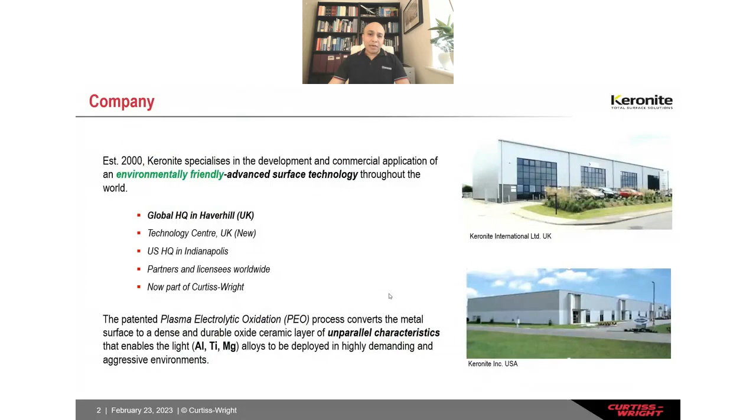Now, from November last year, we are part of Curtiss-Wright. Just to give you a bit of background about Curtiss-Wright as a corporation: Curtiss-Wright has an incredible, proud history. Curtiss-Wright was formed through the merging of 12 Wright and Curtiss companies nearly a century ago.

Let me say a few words about Curtiss-Wright. For those who haven't heard about it, Glenn Curtiss was the father of the US aviation industry. And I'm sure many of us may have heard about the Wright brothers when we were younger in school, and they were credited with inventing, developing, and flying the first motorized aircraft in the world. There you go, it's a very proud history.

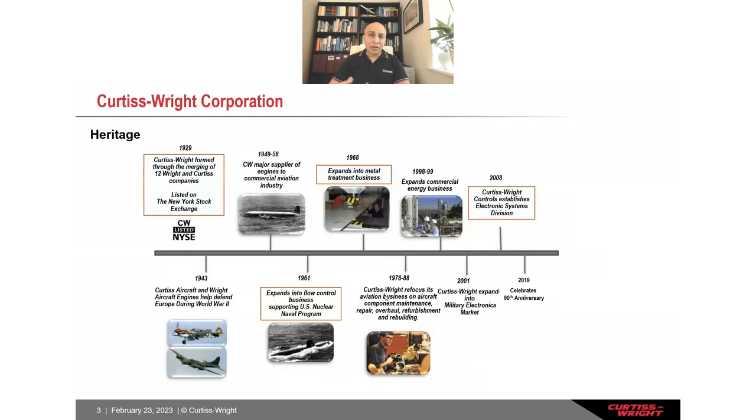And today, Curtiss-Wright is a global technology corporation offering products, solutions, and services in a diversified industrial market, from aerospace to oil and gas, to power and generation and energy sector, defense, automotive, and medical electronics. Curtiss-Wright has its own surface technology division that offers solutions in materials and surface technologies.

It has over 75 business units across the world, as you can see, with lots of dots in North America, in Europe, and a few in Asia too. And now, as Keronite joins, we'll be adding 2 more dots there, one in North America, in Indianapolis, and another in the UK.

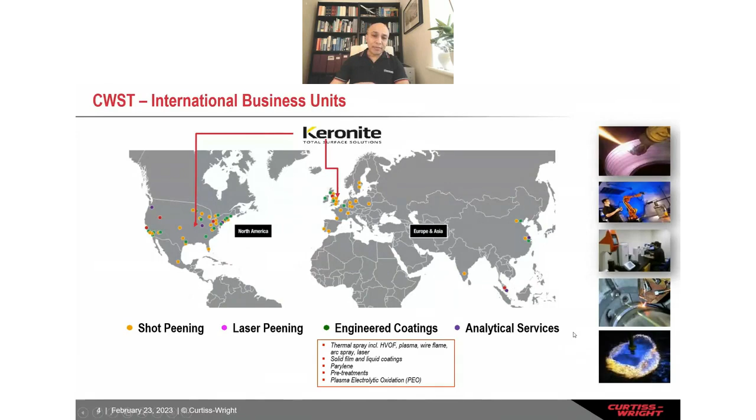When we talk about light metals, the first thing that comes to my mind is aluminum. It is probably the most widely used light metal. Aluminum production is more than all non-ferrous metals combined, and it's considered the second king of metal after steel. Aluminum is considered a developed metal rather than a discovered metal, over a century ago, and today its production has grown exponentially from zero around 1900 to now over 75 million tons a year.

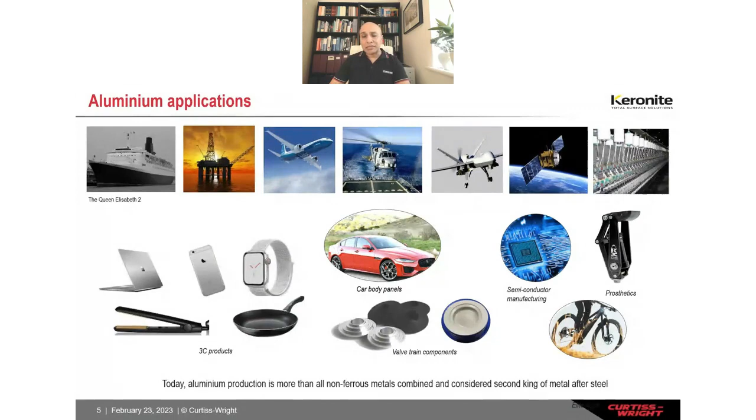Aluminum is so attractive in diversified applications. You can see in these pictures aerospace, ships, drones, and satellites, textile, automotive, and everyday products like laptops, phones, and cooking frying pans, etc. So all of us may have, at some point, touched aluminum as a material. It has an extensive applications portfolio.

So why light metals then? First of all, it's very attractive because it's quite lightweight. Imagine you have to transport lightweight components, parts, anything from one part of the globe to another - you save fuel, you minimize emissions, right? And if you imagine lifting 1 kilogram of weight against gravity to low Earth orbit, you save $50,000 per kilogram. That's a massive saving, right?

Some of the key strengths of light metal: it's substantially lighter - for example, aluminum in our case is 1/3 the weight of steel. It has very good mechanical and physical properties. And most importantly, it can be manufactured in varieties of ways, from extrusion to rolling, casting, injection molding, advanced joining technology, and now also a lot in powder metallurgy, where you have extremely minimal waste. And most importantly, it is a highly recycled material as well.

But it does come with weaknesses. Of course, poor corrosion and poor wear resistance is the main drawback of these light metals. It's thermodynamically reactive and is soft as well, and hence we have a big challenge there. We are continuously searching for new surface technologies that can meet new environmental legislations and also offer multifunctional properties to enable these light metals to be deployed in highly aggressive environments.

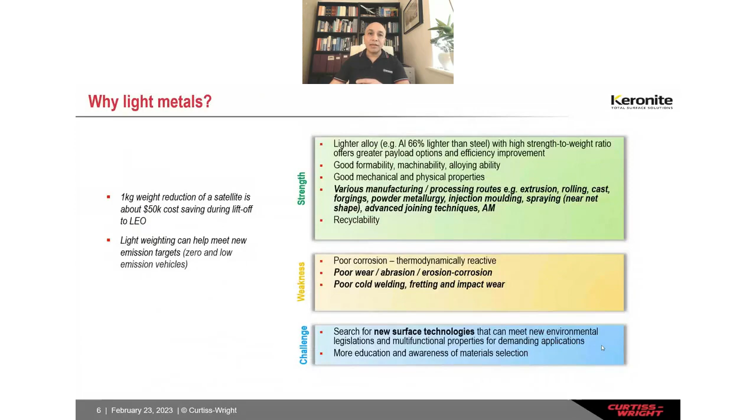The challenge with thermal spray, despite its high attractiveness and versatility, is that it sometimes becomes very awkward on light metals, primarily because of CTE mismatch - the variation of expansion coefficient between, say, aluminum and the incoming hot particles, which leads to poor coating adhesion and flaking.

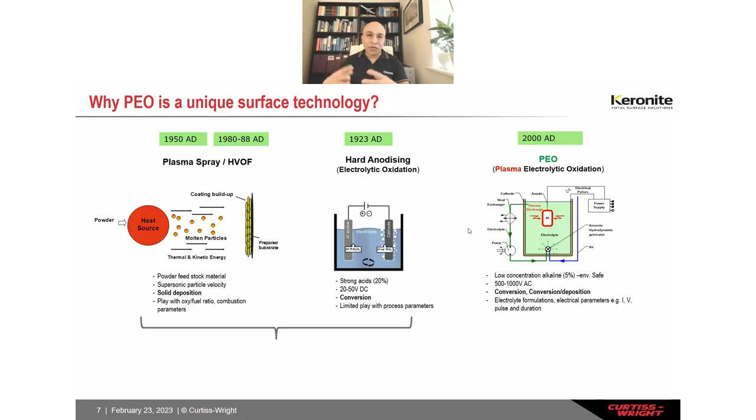The other benefit of PEO is you often use an environmentally safe electrolyte, with very low concentration, less than 5% solid content - typical of a dishwasher liquid that could be disposed of into normal sewage systems. This makes the technology unique, and also, because it's an electrolytic process, you can coat extremely complex shapes with poor line of sight.

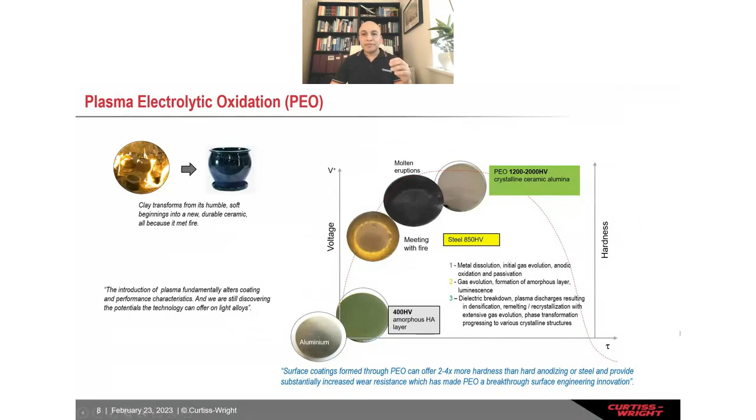Coating design is one of the interesting things about PEO technology. As mentioned before, with thermal spray you can put down a variety of coatings on a variety of substrates. Of course, PEO technology has got some limitations - it is only applicable to light metals.

But the interesting thing is you can change different inputs, like electrolyte formulations. You can change the ionic constituents. You can change the electrical parameters, like the waveform, duty cycle, pulse shape, etc. And by doing so, you can have variable outputs.

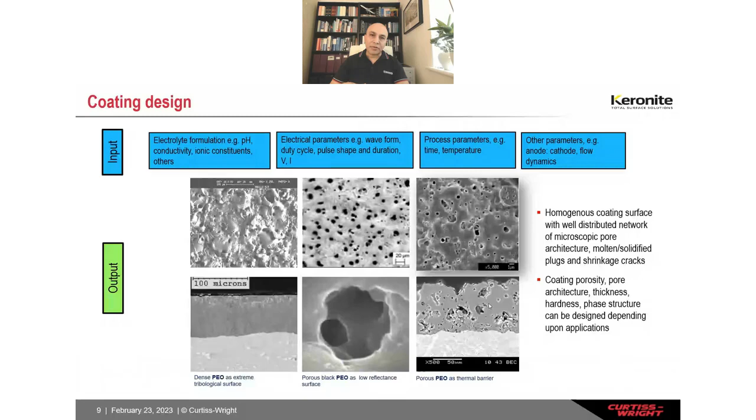On the right-hand side, you can also create aluminum oxide or magnesium oxide spinel type coating, where you can trap porosities with air, giving properties of very low thermal conductivity and low specific heat capacity, for example for applications like thermal barrier coating or piston applications.

Microstructure is quite key. On the top is the hard anodized coating, and the bottom is your PEO ceramic coating on the same alloy. You can see the corners in particular - this hard anodized coating often suffers from what we call truncated V cracks, which result in massive fatigue drop, up to 50% fatigue drop.

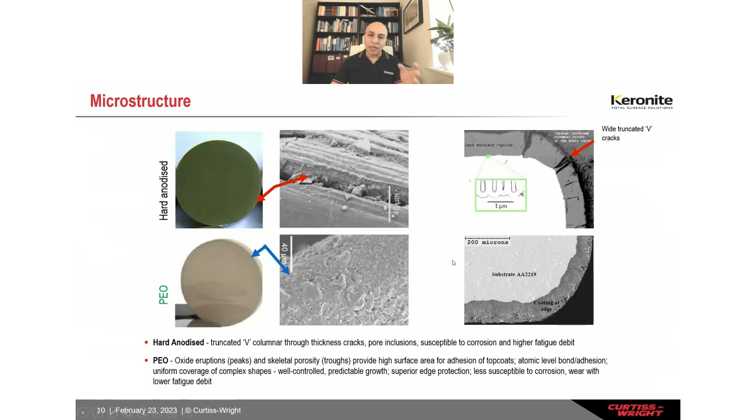This is the cross section. You can see those truncated V cracks extend down to the substrate, making it vulnerable to corrosion, fatigue drop, etc. On the bottom picture here is the same region with PEO - you don't see those wide opening defects or cracks. It's very uniformly covered as well, and you see in the cross section very uniform coverage.

Flexibility is another interesting characteristic of the PEO technology, because of those plasmic discharge events - millions of those happening on the surface give you microscopic pores, shrinkage cracks, etc. That allows you to make the coating very flexible.

One of the Cambridge University PhD researchers measured the Young's modulus of these coatings and found it to be an order of magnitude less than the monolithic ceramic. That allows the coatings to flex and makes it very strain tolerant.

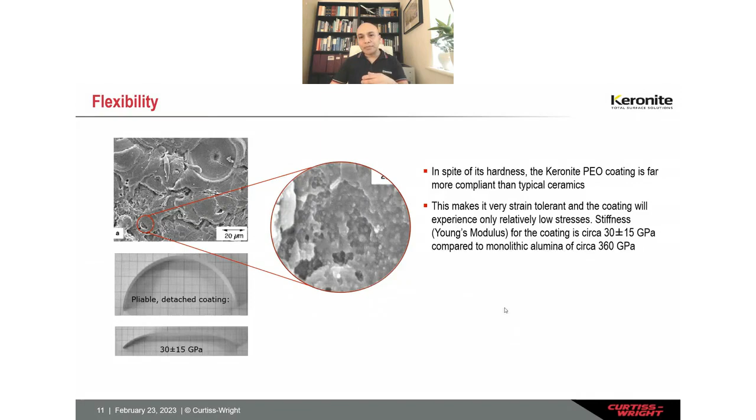Adhesion is another interesting feature. I'd like to show you three pictures here. On the very left is the hard anodized coating, very good interface, good adhesion. This is thermal spray, plasma sprayed alumina, with mechanical keying primarily - you can see from grit blasting, a porous coating. This is PEO alumina here, very dense, very well adhered to the interface.

If you see this plot here, this is the ASTM C633 pull adhesion test. The adhesion of the PEO coatings were in excess of 80 megapascal, quite a lot higher than plasma spray alumina. And here, the dark gray columns are for a PEO coated thin layer, typically 3 to 4 microns, used as a pretreatment.

That's from the lap shear test, okay? If you see, the adhesion values are very similar to chromic acid anodizing. So does that mean we can replace chromic acid anodizing as a pretreatment? Possibly, yes, we can.

And there's already a lot of use of this. When we use this PEO as a pretreatment thin layer and apply a subsequent secondary layer, for example a paint or a powder coat, your critical failure load for adhesion becomes extremely, extremely high. It's very, very resistant to scratch.

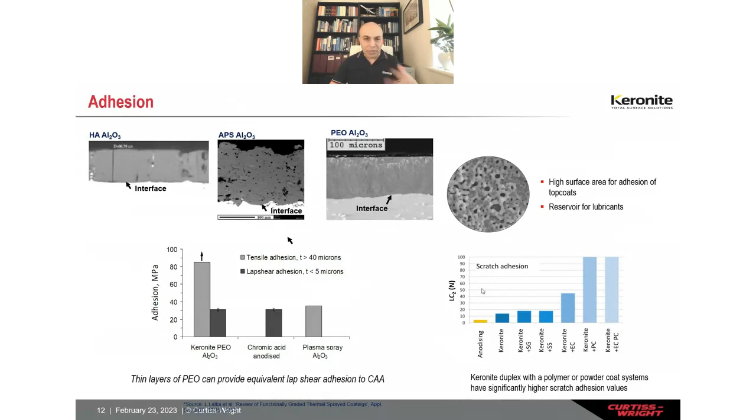Sliding and abrasive wear is another interesting factor here. These coatings have about 1,200 to 2,000 Vickers hardness, which is a lot more than even hardened tool steel, which is about 800 Vickers, and hard anodized, which is about 400 Vickers. This is literally 4 to 5 times harder than hard anodized coating, and significantly harder than hardened tool steel as well. That offers incredible wear resistance to the PEO coating.

On the right-hand side is the abrasive wear resistance. You can see again, this PEO coated sample has much less volumetric wear compared to even nitrided steel.

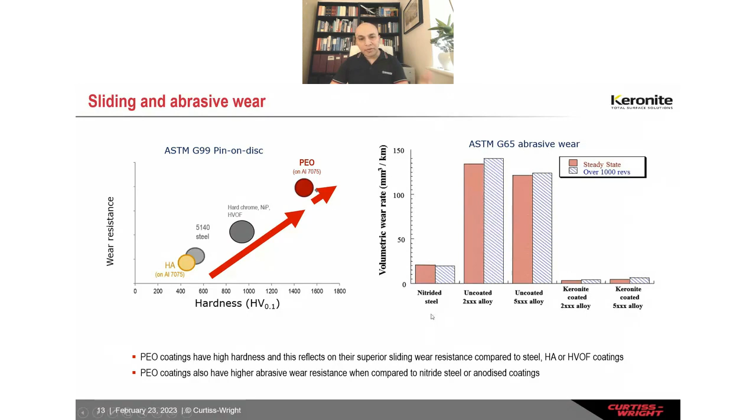Corrosion is another interesting factor. As I said before, those truncated V cracks on the hard anodized coating result in premature corrosion from the edges, for example. This could impact fatigue and even worse, corrosion fatigue. The PEO coating doesn't tend to show those issues.

On the bottom picture we have a powder coated aluminum substrate. On the left, you have the chromic acid anodizing treatment first. On the right-hand side, you have a thin layer of PEO. What was done here is the powder coat was deliberately damaged, scratched, and exposed for 12 months to salt spray solution.

What you see on the left-hand side is typical of what we call corrosion creep. The corrosion is migrating underneath the paint, resulting in a blistering effect deep under the paint. On the right-hand side, because the coating was damaged down to the bare substrate, you will see corrosion happening here, but it's not migrating further because it stopped right there due to a very well adhered ceramic layer.

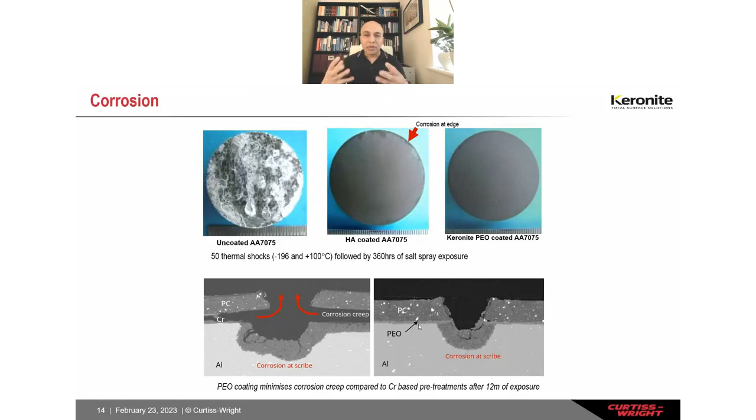Bear in mind that alumina is electrochemically neutral, so it doesn't accelerate galvanic corrosion or anything like that. Having excellent bond with the substrate and excellent bond with the top coat or subsequent layers gives you very good corrosion protection even when it's damaged.

Now, let's talk about some applications.

We recently had big success especially on space missions. Keronite has flown on dozens of missions, including environmental mapping, Hayabusa, Euclid, meteorological operations satellites, Sentinel satellites, etc.

On this middle one, I call it selective masking, because you are coating all of these deep pockets and thin ribs, but also need to mask these shiny areas for electrical grounding purposes. So the electrolytic process gives you the ability to selectively either mask or coat.

On this top picture, you can see the specular reflectance. The PEO coating, the Keronite coating, has in fact very similar performance to the competing coating, or even better, across a wide range of wavelengths. Other coatings are primarily paint-based systems, which are not good for a number of space missions.

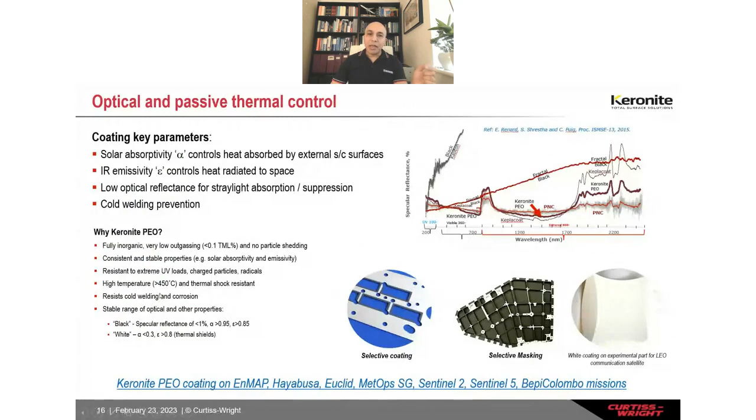Another aspect of the space is cold welding. You often hear about it, and people ask what is cold welding. Unlike arc welding, TIG and MIG welding, it is a different welding process - it's the welding of two components coming into contact in a cold environment.

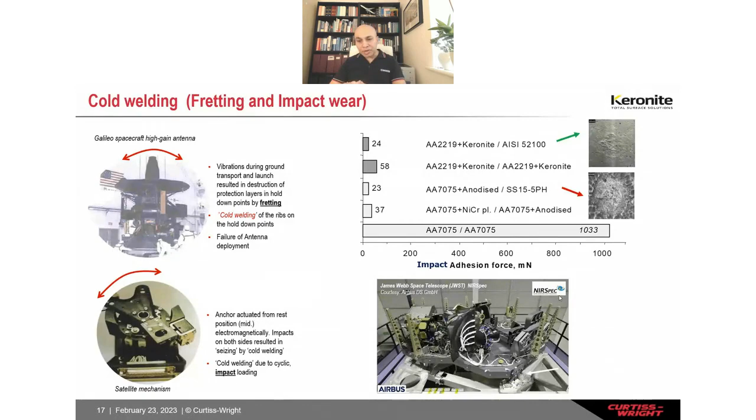After extensive tests on these parts, one of the successful stories was the Keronite coating was sent to the James Webb Space Telescope on board the near-infrared spectrometer built by Airbus, which is one of the critical instruments of the James Webb Space Telescope.

Tribology and friction is another interesting area. As I discussed before, with the PEO coating, all these pores act as a reservoir for either oil or solid lubricants, for example. This is a picture of a ring that was coated with Keronite composite structure, and that was successfully used on the world's largest space observatory in Gran Canaria. This data shows the friction coefficient of the Keronite composite coating at different pressures - as you can see, very, very low friction coefficient as well.

And today, similar PEO coating is already being used in various applications, including the Boeing 737 aircraft.

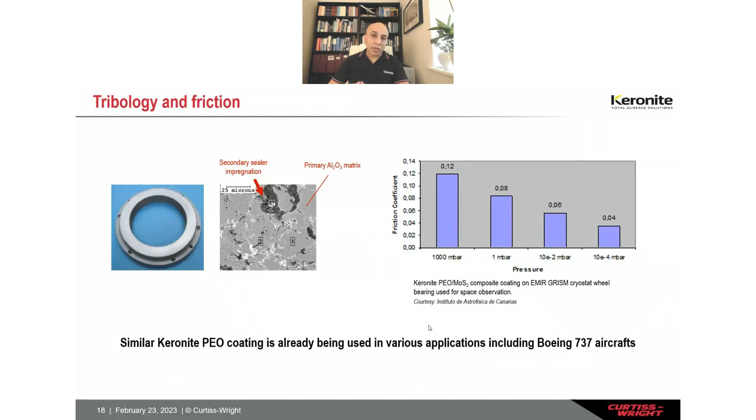Let's talk a little bit about applications now - why we've been more involved recently in brake discs. There's incentive for us because it's a volume market, and also we can make a difference to the environment. Most of us are aware of brake disc technology, and to date mostly grey cast iron is used. A typical grey cast iron disc for a mid-sized car weighs about 40 kilograms in total, about 9 to 10 kilograms per brake disc. If we can reduce 20 kilograms, say by using an aluminium disc instead, that could save 0.1 liter fuel per 100 kilograms, 100 kilometers of travel, and that means a corresponding reduction in CO2 emissions.

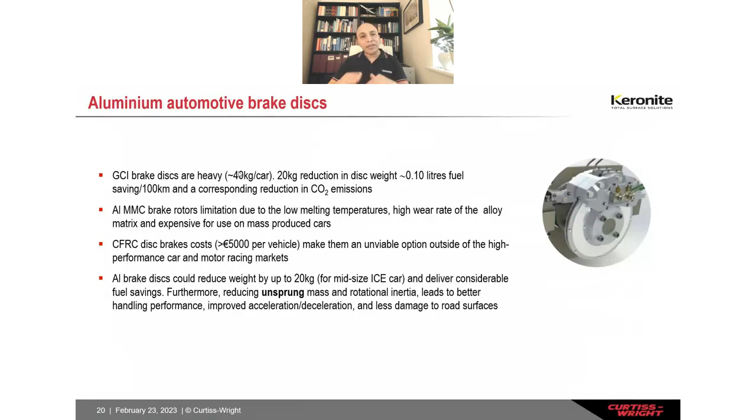It's not that people haven't thought about light materials - yes, they have come up with aluminum MMC and CFRC as well, but they are extremely expensive and become an unviable option outside of the high performance car and motor racing markets. So we thought, let's give it a go with brake discs made of aluminium. If we can save 20 kilograms, it can give considerable fuel savings, and also reduce unsprung mass, which is good for acceleration, deceleration, and also causes less damage to road surfaces. Unsprung mass is anything below the suspension, we call it the unsprung mass.

Just to give a little background on non-exhaust emissions - I've literally been learning about this over the last 5-6 years. People are very much not aware of these problems. What I'd like to show here is road transport particulate emissions, or particulate matter, typically known as PM2.5 and PM10. They are submicron size, they pass through the lungs and create a lot of problems for human organs.

There's a good report done by COMEAP, the Committee on the Medical Effects of Air Pollutants, on this subject.

This equation shows that road transport PM is made of exhaust emissions and non-exhaust emissions. The exhaust emissions are everything that comes up the tailpipe, and the non-exhaust emissions are a combination of brake wear, tire wear, and road abrasion wear.

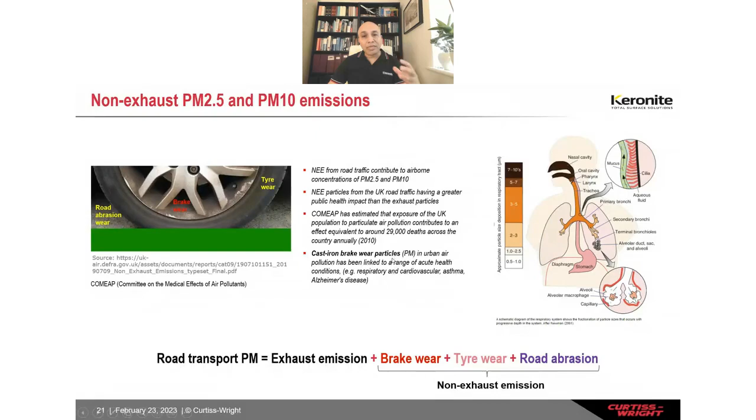The COMEAP report states that non-exhaust emission particles from UK road traffic have a greater public health impact than exhaust particles, and have reported about 29,000 estimated deaths across the country alone. So it's very important that we tackle these particle emissions, whether from brake, tire, or road abrasion.

This has been tackled very well over the last 20 plus years, despite the diesel scandals, especially for PM emissions. We managed to filter it through exhaust gas recirculation systems or using DPF filters, diesel particulate filters, etc.

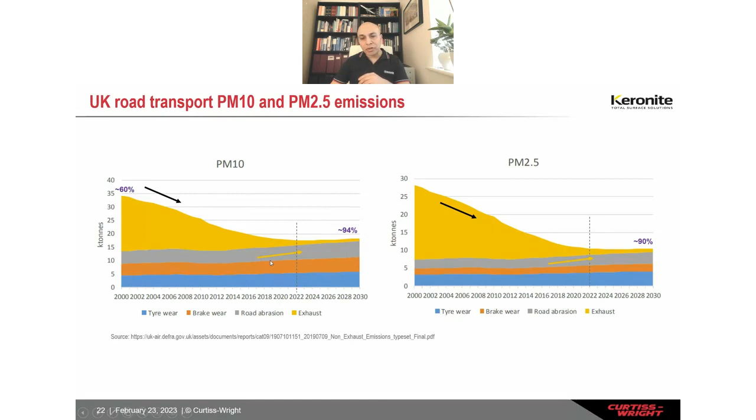But what we haven't been able to manage or tackle is the non-exhaust emissions. It is slowly increasing, and if you see the projected numbers by 2030, it's growing even more.

So we thought, okay, let's give it a shot, and we put a proposal to the UK government, and Innovate UK funded this project. What we did here is test an aluminium brake disc, full size, for a mid-size high-performance car.

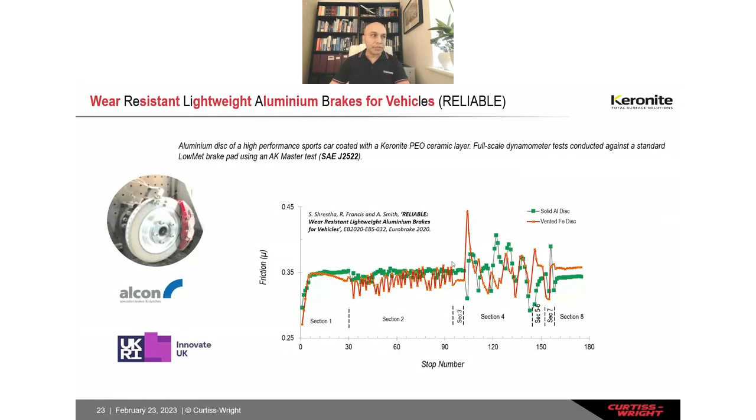Now let's look at the non-exhaust emissions. We've been doing this test for a number of years. Leeds University has an extensive, state-of-the-art facility for measuring brake disc particulate emissions.

This particular data was provided by our student, Fabian Limmer, who's in the last year of his PhD. As you can see, the total mass loss from the gray cast iron system is over here, and the PEO coated system shows about 82% reduction in mass loss.

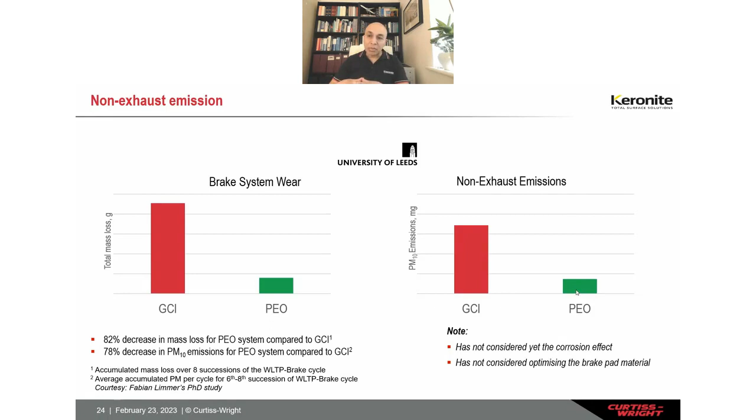If you see on the right-hand side of this plot, the non-exhaust emissions, especially the PM10 emissions, the PEO coated system shows a 78% decrease in PM emissions, which is incredibly encouraging data.

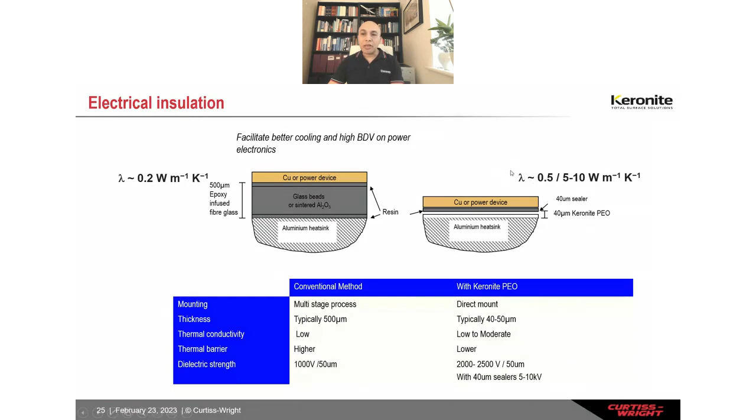If you want to achieve higher breakdown strength, you can seal those PEO coatings with secondary sealers, for example up to 40 to 50 microns, and achieve 5 to 10 kV breakdown strength, while still having substantially higher thermal conductivity than epoxy-infused fiberglasses.

Another interesting area is the aluminum tool — the low-energy aluminum tool heating technology, also funded by the UK government's Technology Strategy Board. The aim here is to form complex lightweight components, lighter than metals, using this thermoplastic fabric, which requires rapid temperature cycling, making aluminum a fantastic material.

So what we did there is coat it with an electrically insulative coating, a thin layer that could dissipate heat fairly quickly during high cyclic loading and fast cycling.

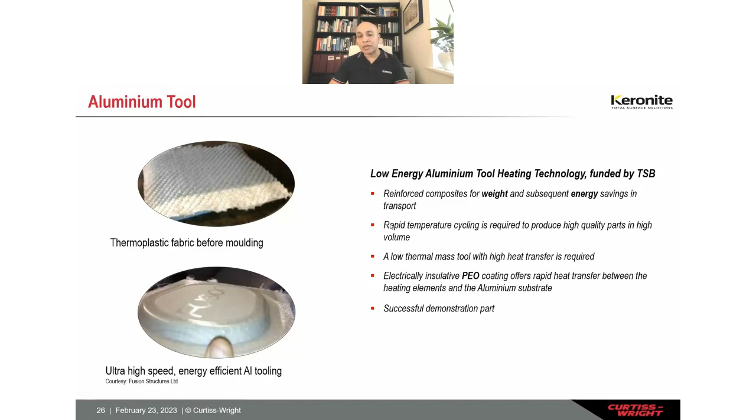Another application is tribological, where you can think about replacing steels with this hard coating, whether it's clutches, gears, valve train components, and in particular semiconductor areas. We are very active there. Semiconductor cleaning and manufacturing chambers require resistance against chemical and plasma erosion from aggressive reactive gases, and these are highly complex parts. You cannot do thermal spray, and hard anodized coating doesn't offer enough protection, hence we have this new coating material.

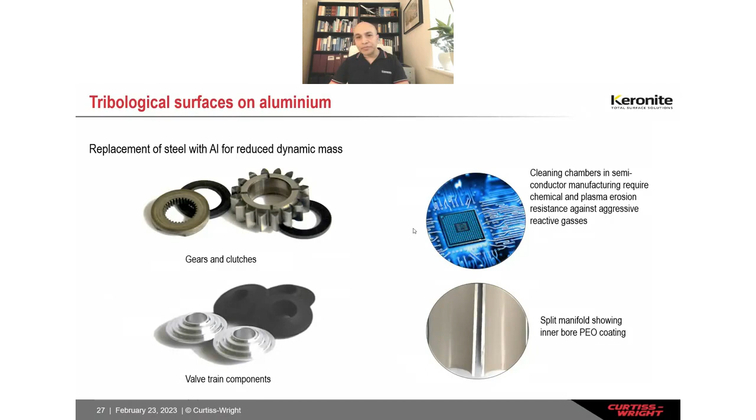There's also a lot of interest in robotic instruments, for example for minimally invasive surgery, because these robotic surgical parts are extremely small - you cannot coat them with thermal spray. They're only a few millimeters in length and a couple of millimeters in width, very tiny. PEO as a technology gives an excellent opportunity to coat extremely small parts.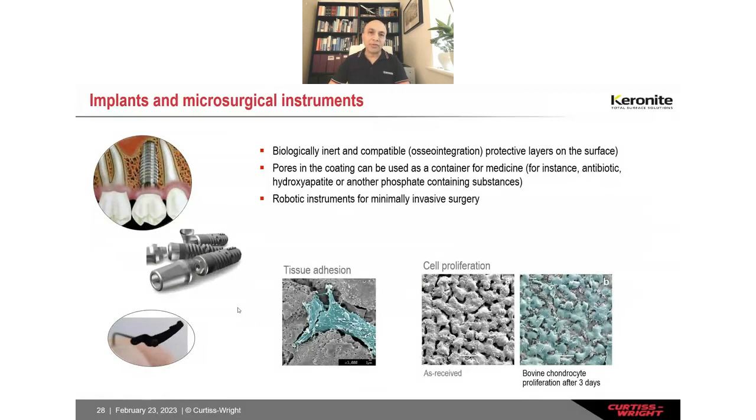Now let's talk about some unique strong points, rather than selling points - these are the USPs for me, the unique strong points.

Can you see this? I don't know whether when I'm showing this you can see that. Okay, I don't hear you, but okay. So this is what you can do with this. Sorry, just here. Okay, yes, we could see that.

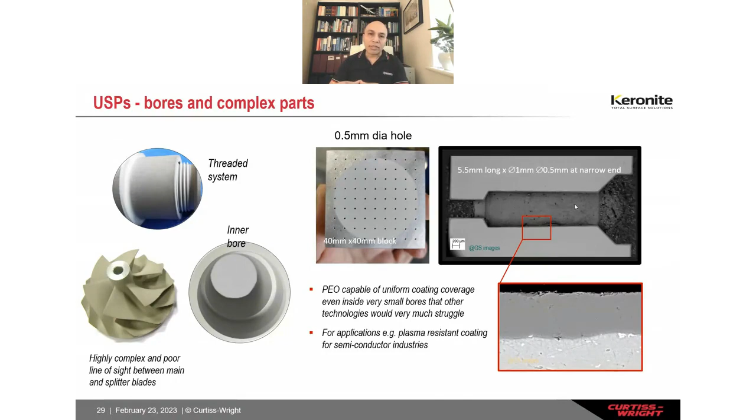These are drill slots about 1 millimeter in diameter and about 5.5 millimeters in length. As you can see, these tiny bores are coated with the electrolytic process. In this section, further down, the SEM picture shows an extremely high dense coating even inside these tiny bores - imagine, a 1 millimeter wide bore, 6 millimeters deep. This is the capability of the electrolytic process that you usually wouldn't achieve with other coating technologies, so it does have unique strong points.

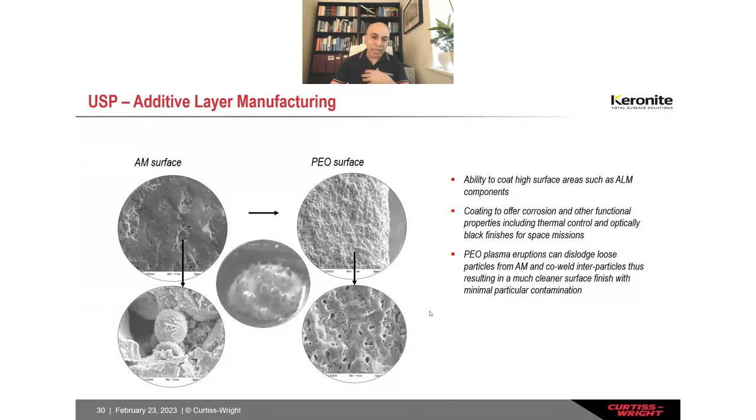On the right-hand picture, you see the part coated after PEO - these flakes are completely gone. If you look at the closer view of this area again, those loose particles and fine dust have disappeared. What's happening here is that during those plasmic and volcanic eruptions, you're either cleaning and dislocating those loose particles so they go into the electrolyte system, or you're melting, re-fusing, and coalescing them together. That's exactly what happens on additive manufacturing parts.

Another strong point is handling continuous large and very small structures. Historically, Keronite as a technology always aimed for mid-sized components, about 1 dm squared to 10 dm squared max for most parts, but we had some requests from space companies.

Hey guys, we cannot use other coating technologies because the environment requires a very good coating like PEO, but we need to coat 3 to 5 meter diameter components for the next generation telescopes. Can you coat it? So we thought, okay, this might be an opportunity. We wrote a small proposal to Innovate UK, and the UK Space Agency funded this project last year, very successfully.

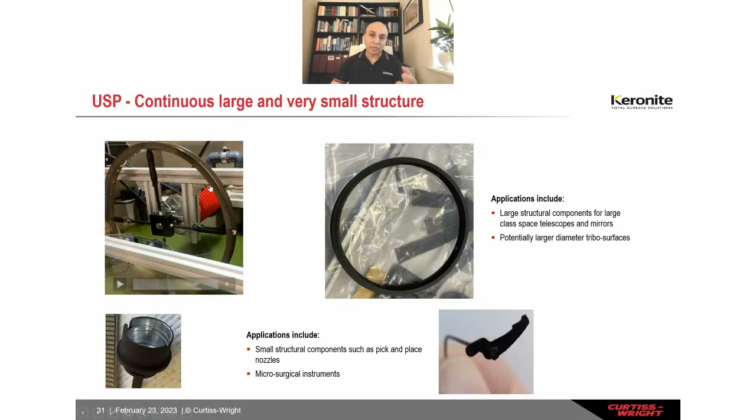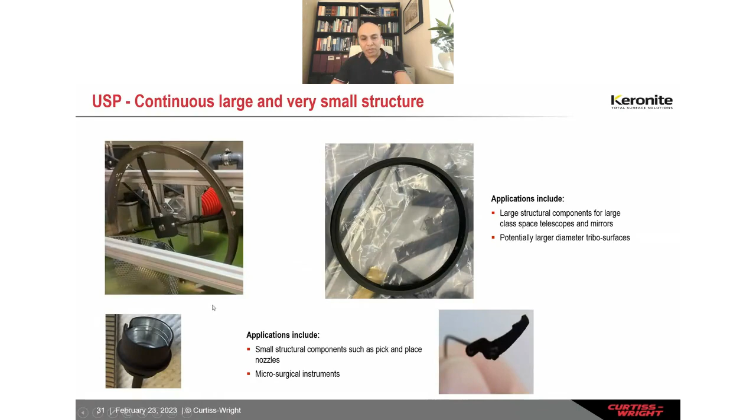This is a mock-up of a large disk, just a 24-inch diameter aluminum disk for example. You can see the beauty here is the whole part is not immersed in the electrolyte as you would in normal PEO systems. Only a segment is being coated. You can see those plasmic events happening at the bottom, here and there. So only a small segment is being coated and continuously rotated, like the Millennium Wheel. And the result is a fully coated wheel.

We extensively analyzed it in terms of optical reflectance, adhesion, and other characterization techniques we used. And the coating, in fact, is very similar to one we would have otherwise coated using a standard dipping process.

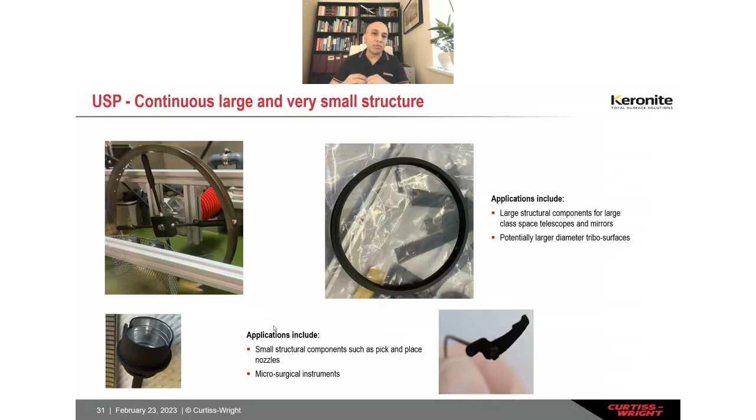Again, we have these little components. Probably other technology would very much struggle with these. These are very, very tiny parts for surgical instruments, or pick-and-place nozzles, very, very small. And this electrolytic process means you can coat extremely small or extremely large components.

The next thing we thought about was, why not use this technology also on thin foils? Of course, anodizing has been done for many, many years - kitchen foils are probably anodized, with a very thin coating, a few nanometers. But now we're talking about a thick engineering coating. So what we did here is coat a 50 to 70 micron thick foil, rolled into about tens of meters, and coated it in a continuous mode.

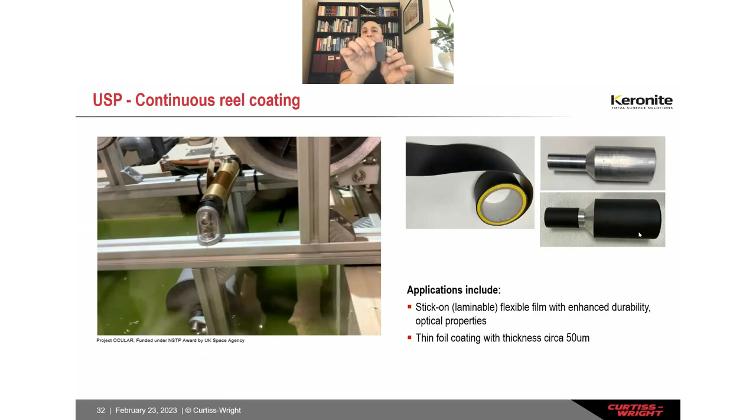And the idea is, rather than having to coat a component, we coat this foil, for example, with a black coating, chop it off with scissors, and then stick it on as a laminable, flexible film. That's exactly what we did - we cut it and wrapped it around those cylindrical surfaces to make it black. For example, you can see this black coating flicked here - it's under tension and it's not coming off. So you can literally wrap it around a part. It is still highly flexible.

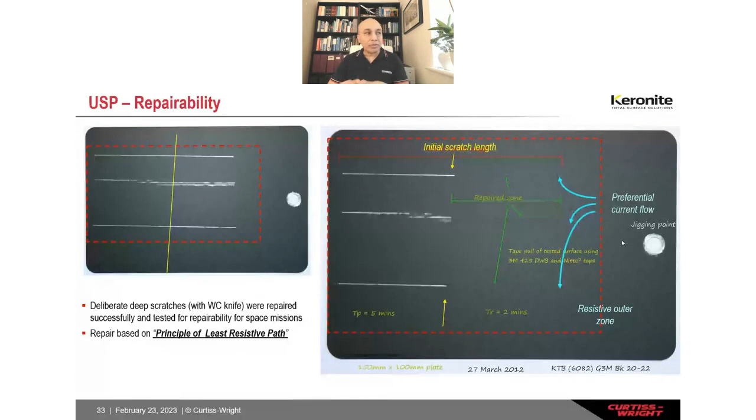And finally, another strong point is the repairability. This job was done for one of the space missions. What we did here is coat a plate, scratch three long scratches with a WC knife, and mask 50% on the left with a tape and a paint, then recoat those damages. On the right, what you can see is a forced healing, I call it, in the electrolytic bath. You cannot even see the seam here - it's almost seamless.

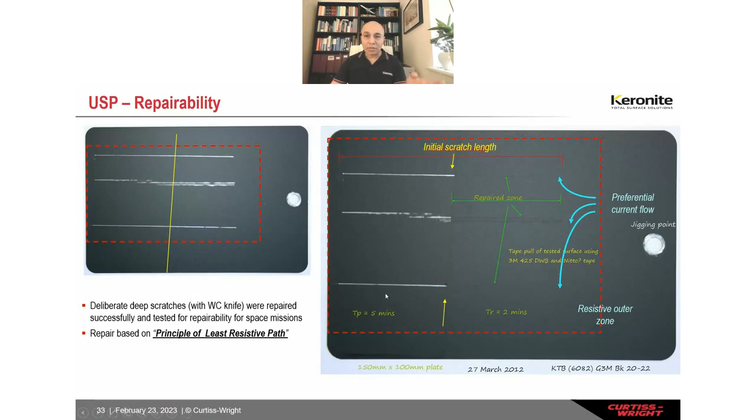On this one, you can see a little bit like a scar tissue, like on human skin. But when we measure the properties, they are identical to the original. The bond was extremely good, the adhesion was good, the reflectance was good, and cross-sectionally it also looked very good. So what is happening here is what I call preferential current flow. All you need is to repair these high-value components rather than stripping the entire component. You coat locally where the damage has occurred, and it works on the principle of least resistive path.

To summarize, PEO characteristics: it has strong adhesion because it's a conversion technique rather than a deposition technique. It has very good fatigue performance, much less fatigue debit than hard anodizing. It's a clean technology, highly strain tolerant, and importantly, it's an inert ceramic and hence chemically very stable. It gives very high electrical insulation because it's an aluminum oxide ceramic, in the case of aluminium. Extreme hardness because it's a corundum you can create on aluminium, and subsequently extreme wear resistance.

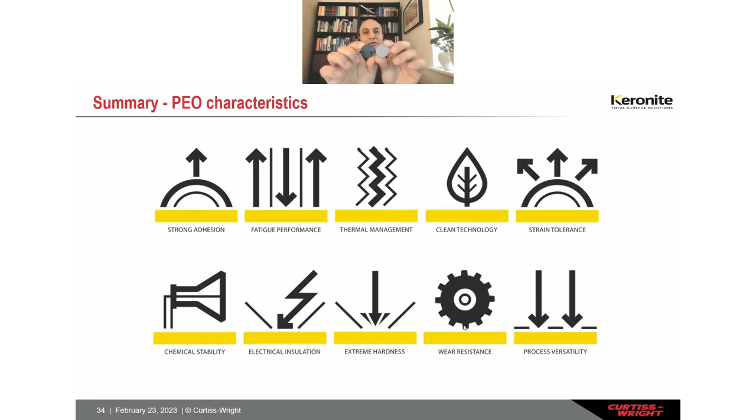And finally, if I show you these samples here, this is your aluminium, bare, humble aluminium. And that's what happens when you convert it into a ceramic with the Keronite process. It's literally a corundum, an alpha alumina, extremely durable. You can cut glass with this one, and that's what it does.

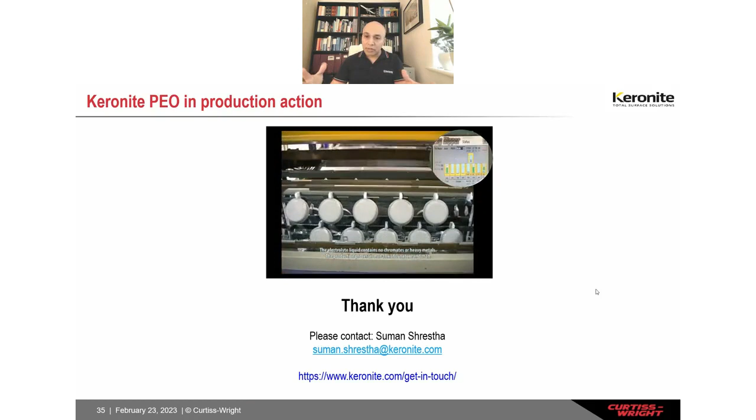Having said that, for the final video, this is the absolute last slide I'd like to show you. This video was taken probably about 10 or 12 years ago, and it shows Keronite in production. You can see about 25 to 30 frying pans being lifted on the flight bar in an automatic fashion. It's moved from one bath to another, and you can also see plasma events happening on those parts.

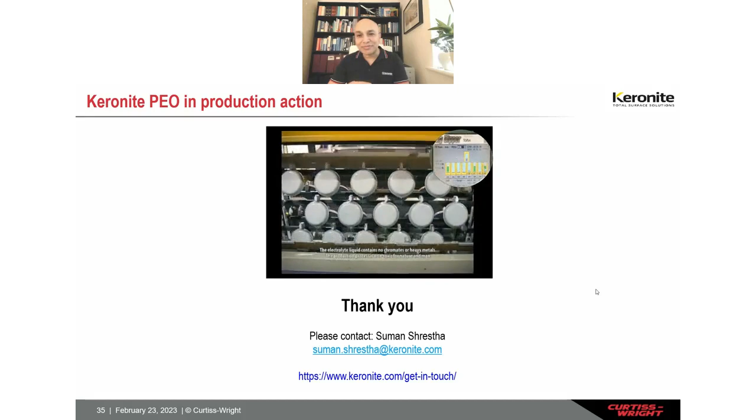And I would like to thank you. I've taken 43 complete minutes. I hope you enjoyed the talk, and I hope you remember some of these videos and the PEO words, and I hope you'll come back to us and say, hey guys, maybe we'd like to do some PEO on light metals. I want to thank you all for your patience and for your attention. Thank you so much.

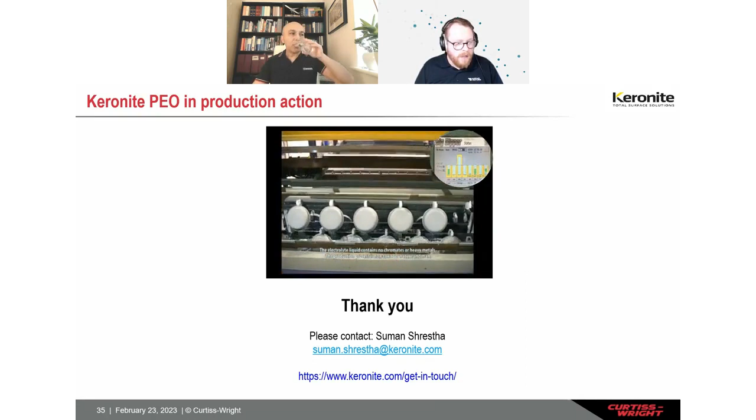Thank you very much, welcome. Sorry, yes, thank you for welcoming me, Sam. Sorry, I was just about to welcome you to the stage. I'll bring up your slides now, and then I'll mute myself so you can give your presentation. And thank you for the great presentation, Suman. As you saw in our video, some applications are quite similar to the field of our research and applications, and therefore I'm quite happy to introduce some buzzwords of what we are doing with our tribo testers at Optimol.

Optimol Instruments has more than 50 years of tribology experience in the field of application-near tribo testing. I saw in your poll questions that many of you are working on mechanical testers and tribometers, and this is where we are at home for more than 50 years right now. We are placed in Munich, Germany.

Today is almost a view like on this picture, very nice weather over here. We are a team of more than 15 engineers with different backgrounds, from chemical engineering, mechanical engineering, physical engineering, and our expertise and our mission is to bring tribological problems from the real field, from real life, into the lab, to simulate the problems on mechanical testers or tribometers with transferable results. This is just some snapshots of the solutions, how they look like later on the tribometer and on the test rigs. So you can see it's a really versatile testing platform that we offer at Optimol Instruments.

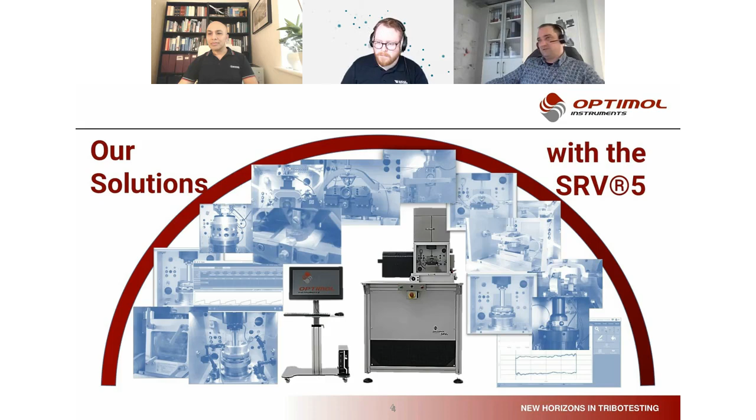So why does it make sense to use tribological test benches compared to field tests or rig tests? Most of you are already aware of those topics. Of course, field tests have the highest practical relevance, but they take a long time. They are comparably expensive, and in most cases they only deliver spot data and not exact data at dedicated operating conditions. The rig test itself brings a little bit more detailed data and has good practical relevance, but nevertheless the duration is still long, and in most cases the expenses of running a bench test are relatively high.

For example, one week of bench testing on a combustion engine costs about 50 to 100,000 euros. And that costs a lot. Imagine you have a fail in your test - that's a huge loss of money in that case.

The benefit of lab scale testing compared to field and rig tests is you have a short duration, relatively low expenses for one test, and a wide flexibility of parameters with good practical relevance, if you don't do only model tests.

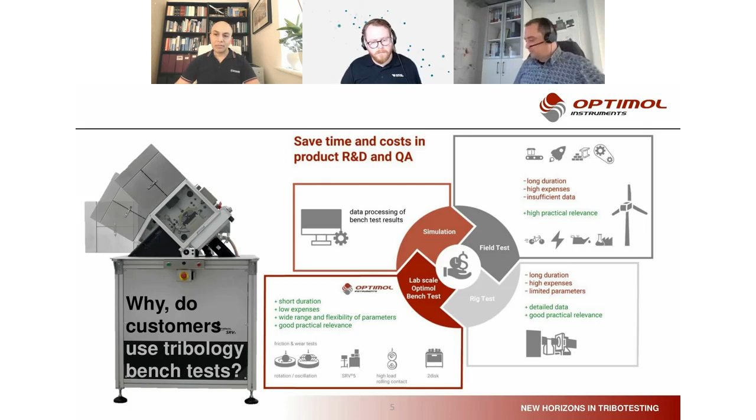Let me show you our main products with one example case study for each product. Unfortunately, Suman and I didn't discuss earlier, otherwise I could have shown exactly fitting use cases to Suman's application, but I think you'll be able to imagine we have similar test procedures also for applications as Suman presented.

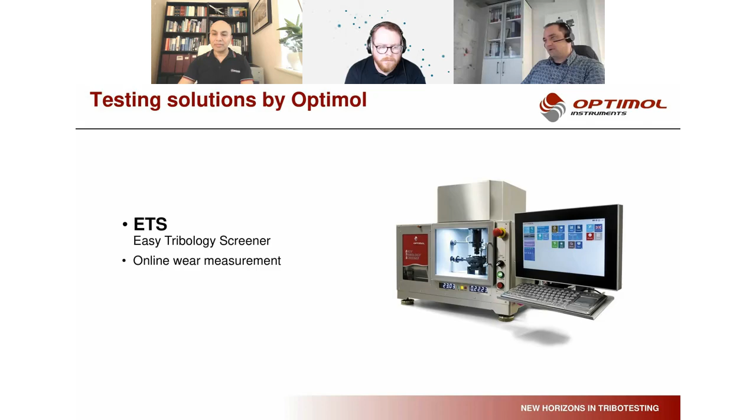So one of the smallest test rigs that we have is the so-called ETS, Easy Tribology Screener, with online wear measurement. It's a simple and easy benchtop tribometer where you can do simple model tests under fretting conditions with adjustable temperatures, adjustable loads, adjustable sliding speeds, like we did in this case for our organic coatings.

Those organic coatings are very thin films. In this case, the target was to coat contact lenses with these organic coatings in terms of producing sustainable contact lenses that you can use several times with high durability and very smooth friction properties, in order not to get any problems between the eye itself and the contact lens.

Therefore we had four candidates for organic coatings. All were applied on bronze discs, and the counterpiece was a POM plastic ball, and we ran under dry and wet conditions with the lubricant water.

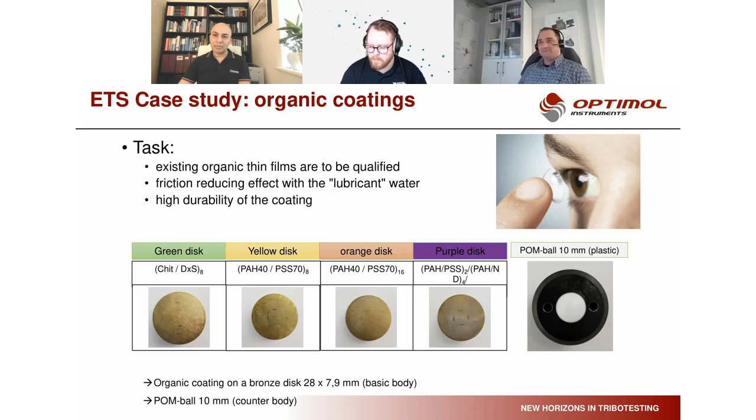You can see here, I just put some microscopic images after the test. One, the so-called purple coating, had relatively high wear under dry conditions and very low wear under wet conditions. But interestingly, if you look at the wear tracks, even if there's a relatively higher amount of wear under dry condition, the wear track is very smooth.

And this is what's relevant in the contact between the eye and the lens, that the surfaces always remain very smooth. Otherwise, you will have irritations.

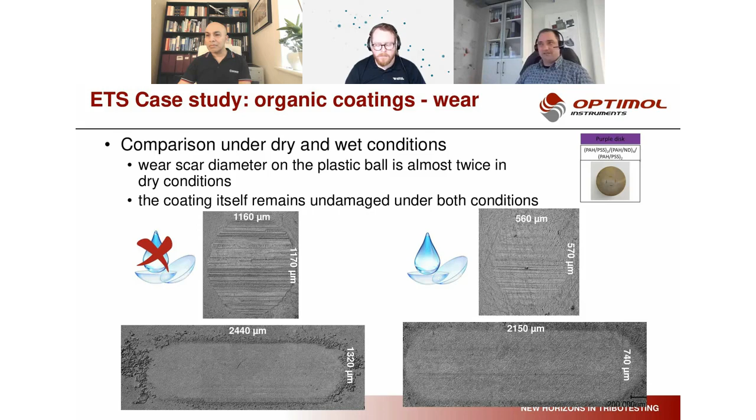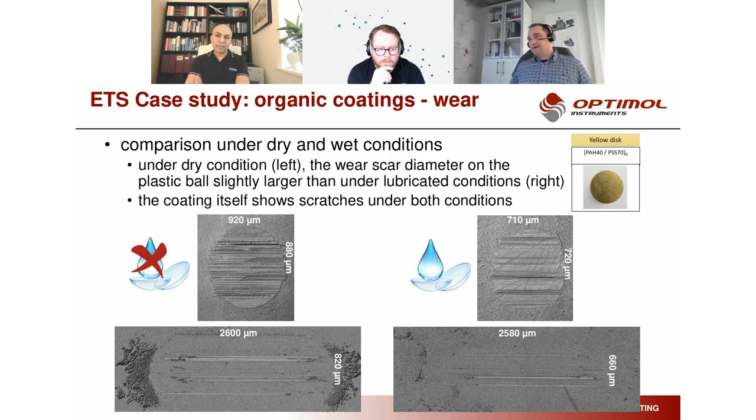While this yellow disc, for example, produced damages on the surfaces in both cases, wet and dry - the wear tracks look relatively destroyed and damaged, and this already disqualifies those coatings for the target application.

If you compare the friction and the wear with online measurement, you see that the COF under wet conditions is nicely low. In this application, the wear is represented in the blue curves, and the friction is represented in red. You also see that the repeatability is quite nice, even if this is an exotic application.

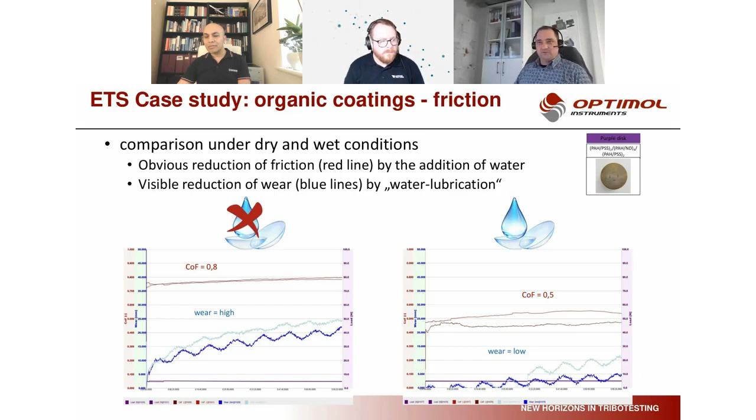While under dry condition, obviously friction is higher and wear is higher. And this is how you can easily rank different coatings, different materials, different lubricants in terms of wear resistance and friction behavior in a model test.

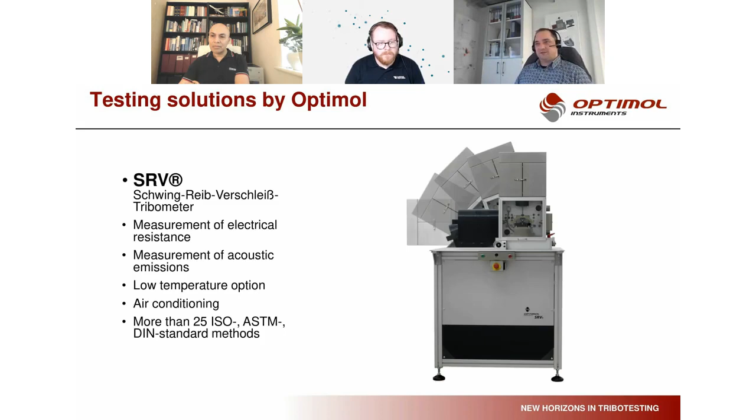Now let's switch to the next size of test bench, the SRV, one of the most famous tribo testers in the world, with lots of standard methods at ISO, ASTM, DIN and so forth, with different temperature options from -45 up to 1000 centigrade, with an air conditioning system, and different measurement possibilities for electrical contact resistance, acoustic emissions, and so on.

One case study I'd like to shortly show is the topic of gear components. This is kind of an overlap with Suman - so when you develop new components of aluminum alloys with Suman's coating, you can test them on the SRV in terms of...

...scuffing properties, where we have a very simple screening test. We increase the load stepwise and observe if and when, at which load stage, we detect scuffing failure, seizure, cold welding, whatever damages are occurring in the gear.

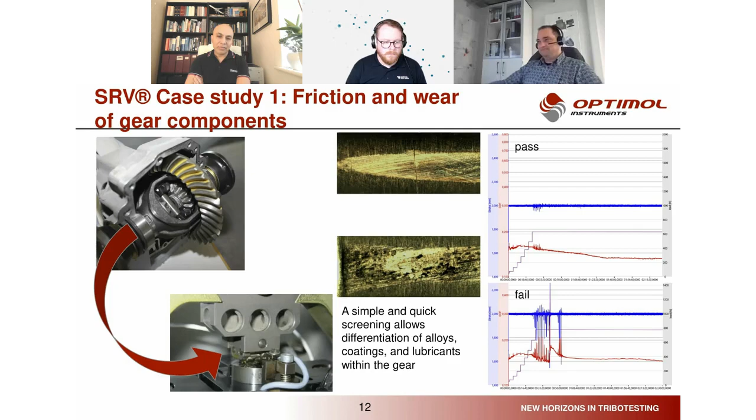Another up-to-date problem is out of the electric drivetrain, where we can easily test the compatibility of hairpin wires with EDF, the electric drivetrain fluid. Using electrical resistance measurement, we can detect if there's a breakthrough of the layer, if there are damages, even after a longer time of test, and we can observe if the friction remains stable.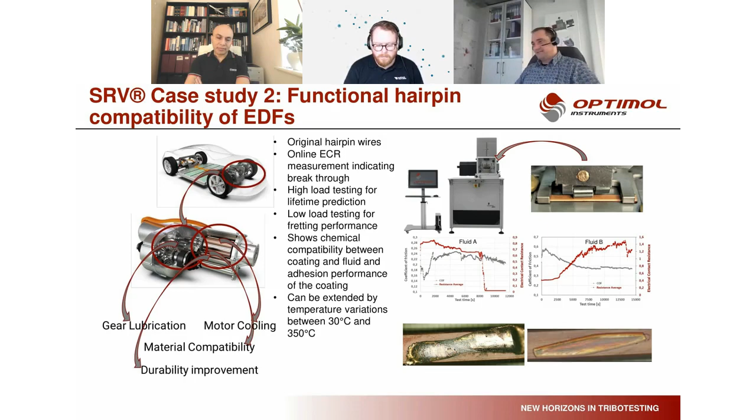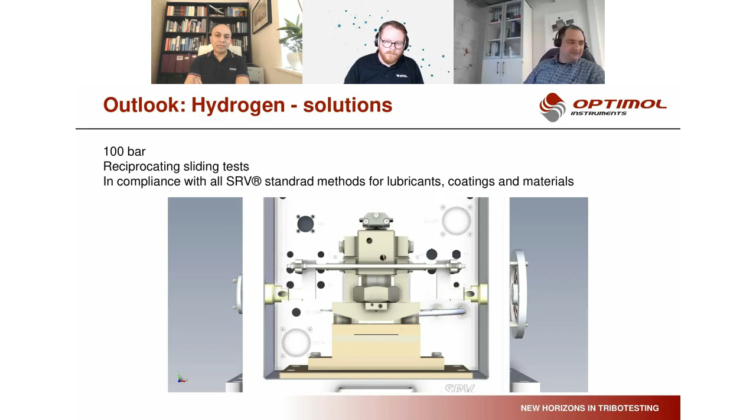Another very interesting application that we have today is hydrogen. You know that in many different applications, one talks about hydrogen to replace conventional fuels. This is where we are developing now a hydrogen test cell, where we can do tribo tests under hydrogen atmosphere up to 100 bar.

Last but not least, I would like to mention with one short slide our 2disk test rig for slip rolling testing. This is more targeting on fatigue properties. There you can do heavy-duty traction tests with adjustable slip rates, high loads up to 5 kilonewton, with plenty of measurement possibilities.

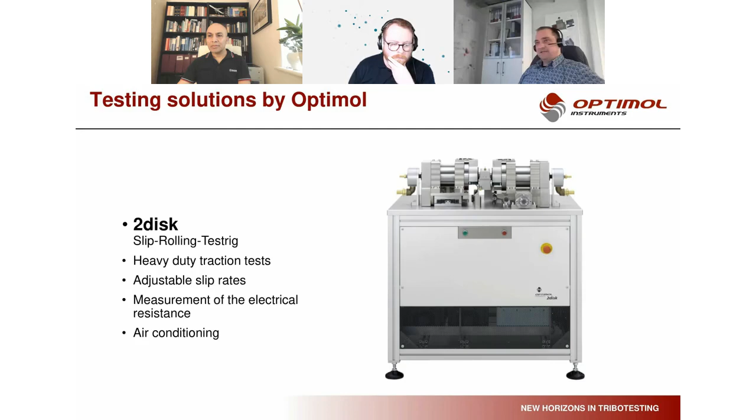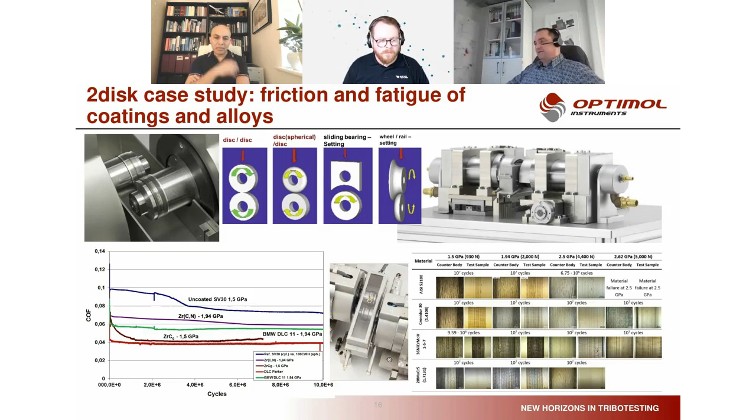As you can see here in this short case study, targeting on friction and fatigue of coatings and alloys under slip rolling conditions, where you can nicely differentiate, on the one hand side, the friction properties, and on the other hand side, fatigue damages on the surfaces, where you can see pittings, micro pittings, and of course during the running-in period you see also abrasion and all other mechanisms.

And this is where I'm at the end of my presentation. I took a little bit longer than 5 minutes, but I hope it was interesting. Thank you again for joining the webinar today, and to Surface Ventures for hosting us, and to Suman for the very interesting presentation.

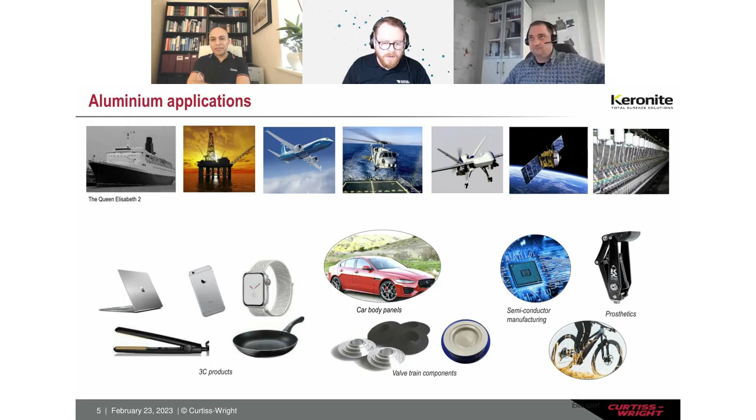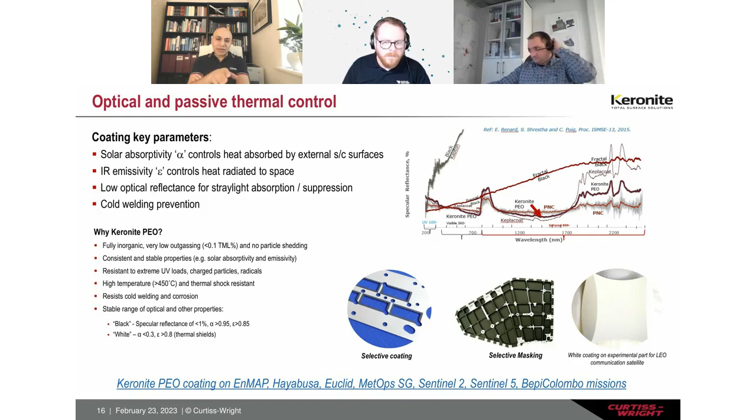Just to respond to Sankara's question, you have got the PEO layer on the aluminum substrate, which is an atomically bonded layer, a thin layer, it's got a very good bond. But then you have got lots of that pore architecture at the PEO. So what this PEO is doing there is providing a bond layer for the powder coat or paint or subsequent layer, so it is extremely well bonded to the PEO layer. So you have got the extremely well bonded PEO to the substrate and extremely well bonded top layer to the PEO. And because PEO is electrochemically an inert layer, you don't have the galvanic interactions between the alumina and the aluminum substrate. So what is effectively happening is on the damaged zone, you are expecting the corrosion to happen as normally you'd expect. It corrodes, but A, it is not driven badly by the galvanic interactions because there is no other cathodic couples. And B, it is because the corrosion is not pushing downwards.

It just stops there, because the ceramic layer bond is stopping further propagation, the corrosion creep. You don't have that in other chromate treatments, other things, because usually you tend to push those corrosion products underneath. And because the bond is not very strong, it tends to migrate underneath and gradually pushes up that polymeric layer, resulting in blisters and further propagation and peeling off the polymer layer. So that's exactly what is happening there. So I don't know whether I've answered Sankara's question. Are you happy with the answer?

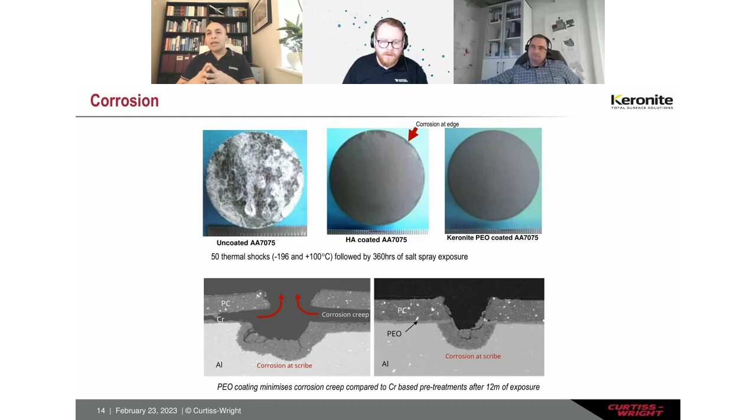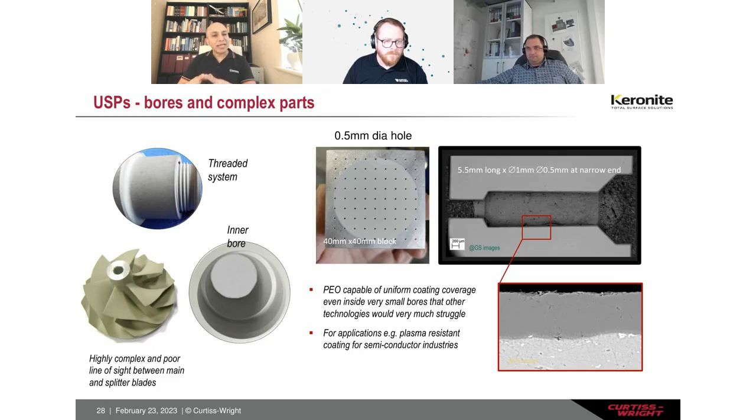Very good question again. As I said before, yes, PEO coating will generate some roughness and it will reduce the fatigue, but not to that extent compared to the hard anodized coating. But if you're already reducing fatigue by, say, 80-90% with those large cracks and porosities in the additive manufacturing component, if you're filling those holes with PEO, coalescing and minimizing those cracks, I thought it's bound to get improvement, not reduction. Of course, you cannot benefit 100%, you cannot go to zero.

Maybe you have to use other technology, maybe machine it first, maybe remove those loose particles first by electrochemical cleaning or polishing technique. But what's shown there is the PEO process on its own - it can clean the surface, it can polish the surface, it can create a uniform coating for uniform coverage. So it's bound to improve the fatigue performance of additive manufacturing, definitely not reduce it.

Okay, thank you very much. Let's move on to the next question here. Again from Sankara, in reference to slide 24 - however, I think you answered this later in the text. I did, yeah. He was asking how the non-exhaust emission was measured.

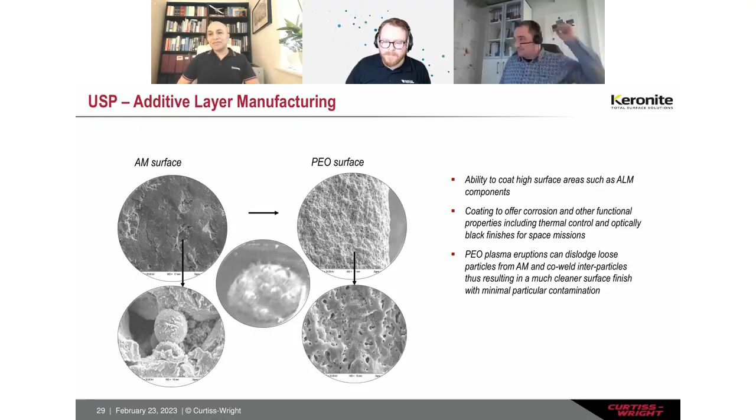Yes, of course. This was a larger study for the coating maker. I'm not allowed to share all the results, but of course we used a salt solution for the tests, the medical salt solution as well, and saw the differences. That's clear.

Okay, thanks, Gregor. I'm just coming to our final two questions here. The penultimate one from Hamid, who asked: Hi Suman, what is the edge of knowledge in PEO today? Are all of the problems solved?

I like this question. I think we are just exploring the potential of this technology. There's enormous potential, but we are just unfolding it, and that's why I said before, responding to Pavel as well, we are in the age of aluminium. Aluminium is a lightweight, recyclable, sustainable material, and because this technology is improving, I think we've got to see this. We are just unfolding our capabilities, and you guys will probably be doing a lot more research.

We as a team around the world - and if you saw, I did present today a Boolean search. Over the last 20 years, the growth of research in PEO has grown substantially compared to any other technology. You can find hundreds of publications every year on PEO technology, because there's a lot of interest in it. Of course, we cannot solve every problem, but I'm sure globally, if we put in the effort and do a lot more research, we can unfold many other attractive applications using this technology.